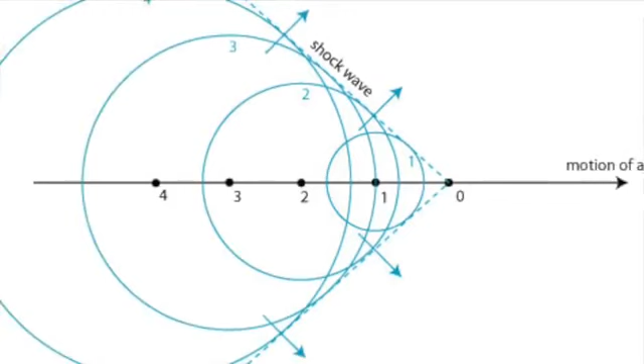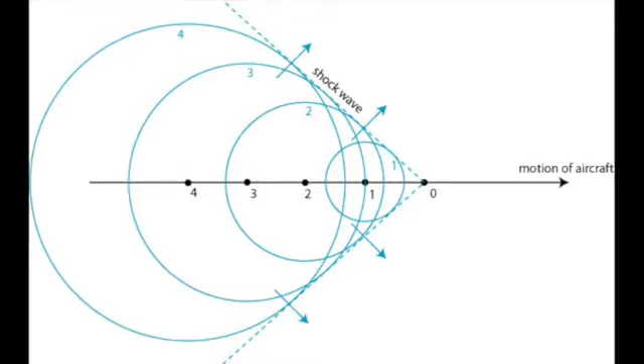A shock wave is a type of propagating disturbance. When a wave moves faster than the local speed of sound in a fluid, it is a shock wave. Like an ordinary wave, a shock wave carries energy and can propagate through a medium. However, it is characterized by an abrupt, nearly discontinuous change in pressure, temperature, and density of the medium.

When a shock wave passes through matter, energy is preserved but entropy increases. This change in matter's properties manifests itself as a decrease in the energy which can be extracted as work, and as a drag force on supersonic objects. Shock waves are strongly irreversible processes.

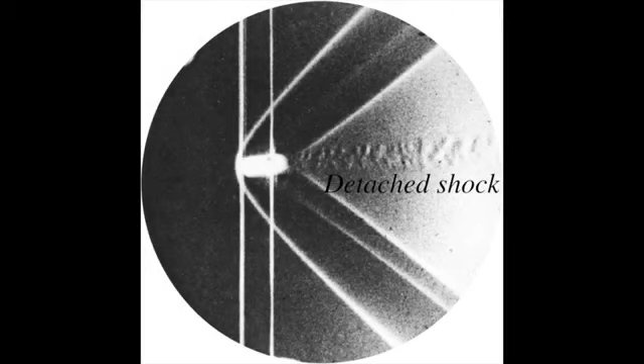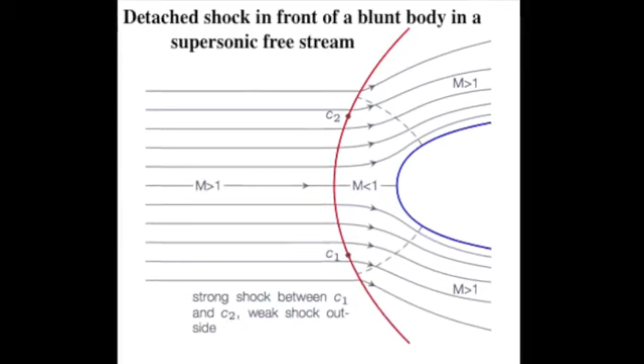Detached shock wave. Consider the supersonic flow over a blunt nosed body as shown in the figure. A strong curved bow shock wave is created in front of this body, with the shock detached from the nose by a distance at point A. The upstream flow is normal to the wave, hence, point A corresponds to a normal shock wave. Away from the center line, the shock wave becomes curved and weaker, eventually evolving into a Mach wave at large distance from the body.

Oblique shock waves. An oblique shock wave, unlike a normal shock, is inclined with respect to the incident upstream flow direction. It will occur when a supersonic flow encounters a corner that effectively turns the flow into itself and compresses. The upstream streamlines are uniformly deflected after the shock wave. The most common way to produce an oblique shock wave is to place a wedge into supersonic, compressible flow.

Similar to a normal shock wave, the oblique shock wave consists of a very thin region across which nearly discontinuous changes in the thermodynamic properties of a gas occur. While the upstream and downstream flow directions are unchanged across a normal shock, they are different for flow across an oblique shock wave. Oblique shock wave applications.

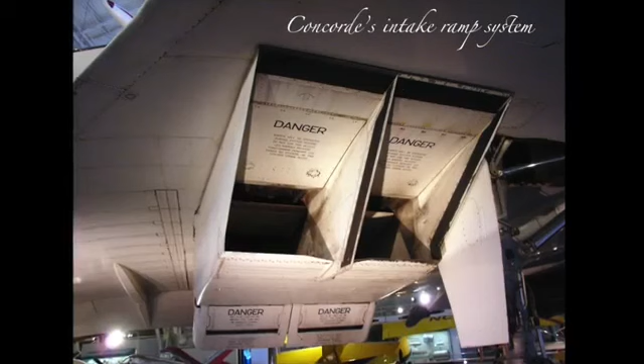Early supersonic aircraft jet engine intakes were designed using compression from a single normal shock, but this approach caps the maximum achievable Mach number to roughly 1.6. Concorde, which first flew in 1969, used variable geometry wedge-shaped intakes to achieve a maximum speed of Mach 2.2. A similar design was used on the F-14 Tomcat. The F-14D was first delivered in 1994 and achieved a maximum speed of Mach 2.34.

Oblique waves are created by the same physical mechanism in which disturbances propagate by molecular collision at the speed of sound, some of which eventually coalesce into shocks and others of which spread out in the form of expansion waves. To more clearly see this process for an oblique wave, consider a moving point source of sound disturbance in a gas. For lack of a better term, let us call this source a beeper. The beeper is continuously emitting sound waves as it moves through the stationary gas.

Consider the first case when the beeper is moving at a velocity V, which is less than the speed of sound as shown in the figure. When the beeper is at point A, it emits a sound disturbance which propagates in all directions at the speed of sound a. After an interval of time t, this sound wave is represented by the circle of radius at in the figure. However, during this same time interval, the beeper has moved a distance Vt to point B.

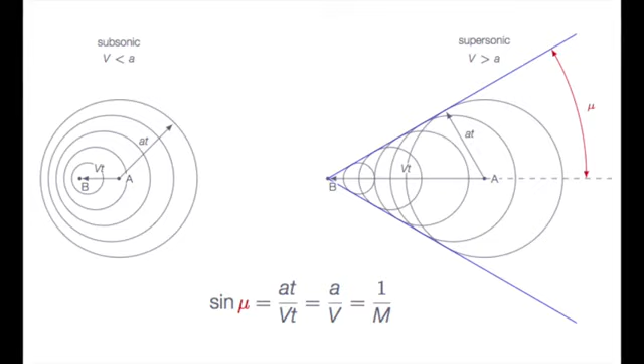Shock tube. The shock tube is an instrument used to replicate and direct blast waves at a sensor or a model in order to simulate actual explosions and their effects, usually on a smaller scale. Shock tubes can also be used to study aerodynamic flow under a wide range of temperatures and pressures that are difficult to obtain in other types of testing facilities.

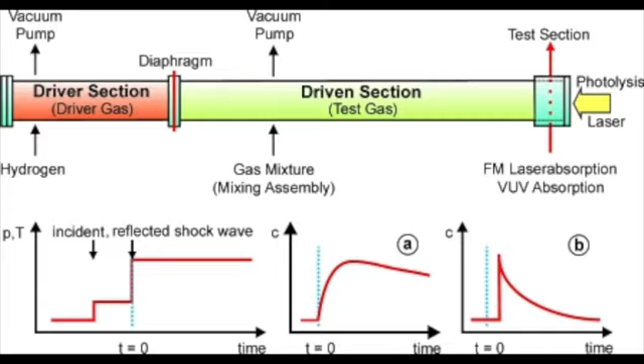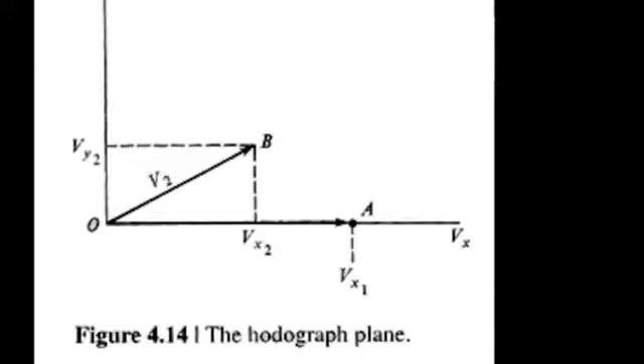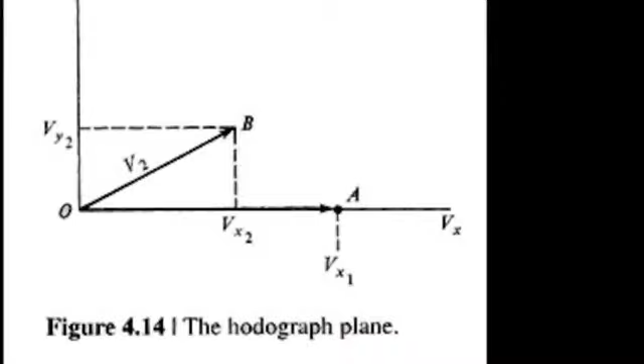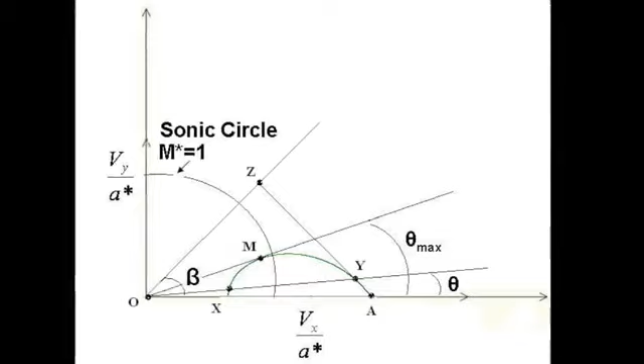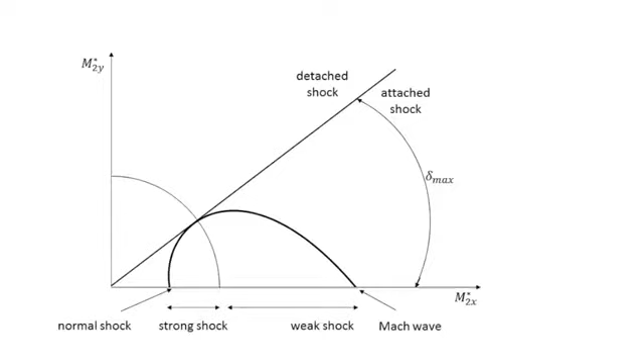This figure is called the physical plane. Define Vx1, Vy1, Vx2 and Vy2 as the x and y components of velocity ahead of and behind the shock respectively. Now, plot these velocities on a graph which uses Vx and Vy as axes. As shown in the figure, the graph of velocity components is called the hodograph plane. The deflection angle is carried through all possible values for which there is an oblique shock solution. Then the locus of all possible velocities behind the shock is given in the following diagram. This locus is called the shock polar.